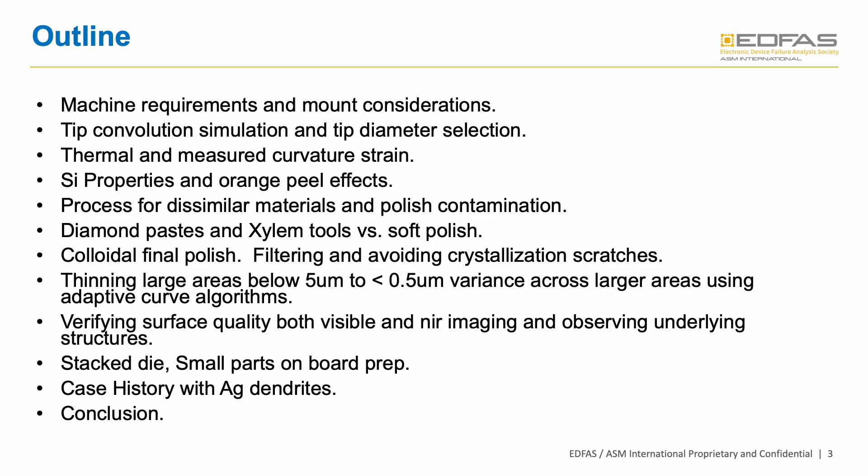So the first thing we're going to cover are machine requirements. So we're going to overview the modules and the mounting methods. The first thing I want to talk about on the machine is how to fit large boards on. So there's an open design where you can place a rather large motherboard in the machine, and you just need to be aware of this Y max value. This is 7.5 inches to the back mast of the machine.

The device can be processed from beginning to end. So you can have it on the board, you can do the thinning, you can do the inspection, you can do the polishing, all of that including the RST measurements without removing it. This allows us to get the submicron precision out of the machine. The endpoints can be based on time, position, force, or capacitance and resistance functions, which we'll be going over in the next few slides.

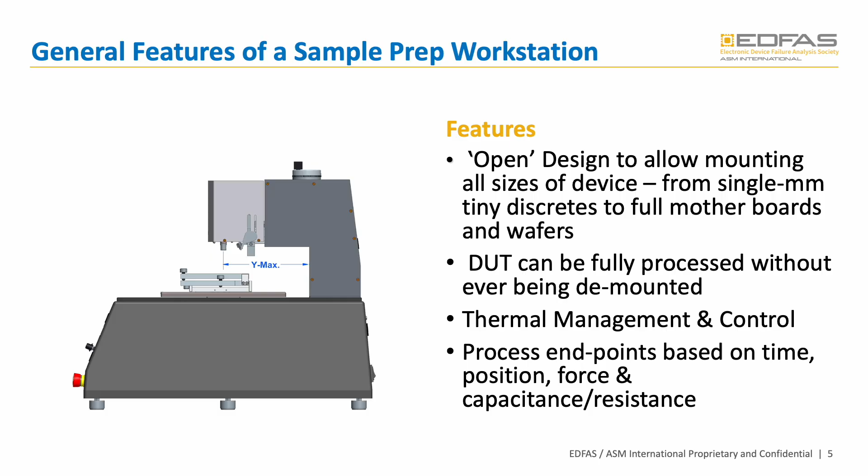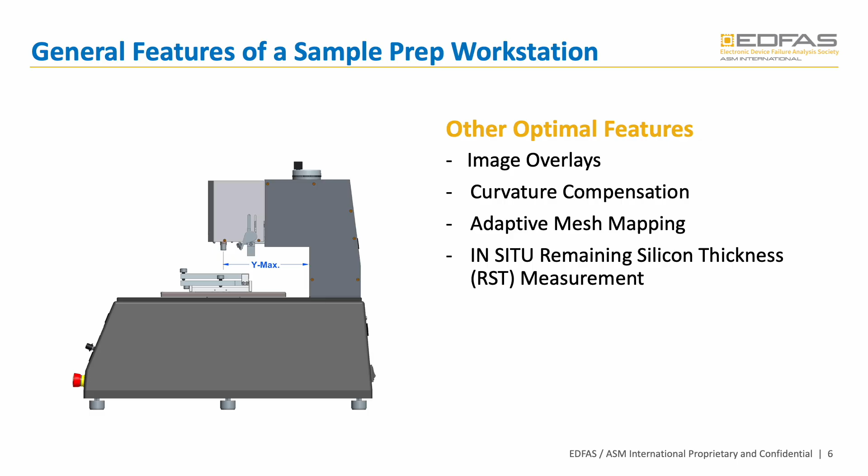Some other features: image overlays, curvature compensation, adaptive mesh mapping, and in-situ remaining silicon thickness. So as I mentioned earlier, by being able to leave the part on the machine, we can do the RST measurements. So by combining mapping and polishing, this is what makes the high-resolution control possible. So you start out with a curvature mapping model. So this is an R-squared model where you're actually defining a curve and forcing that curve on the part. This is based on thinning the part, measuring the RST thickness variations from center to edge, and then matching a curve based on the tip diameter.

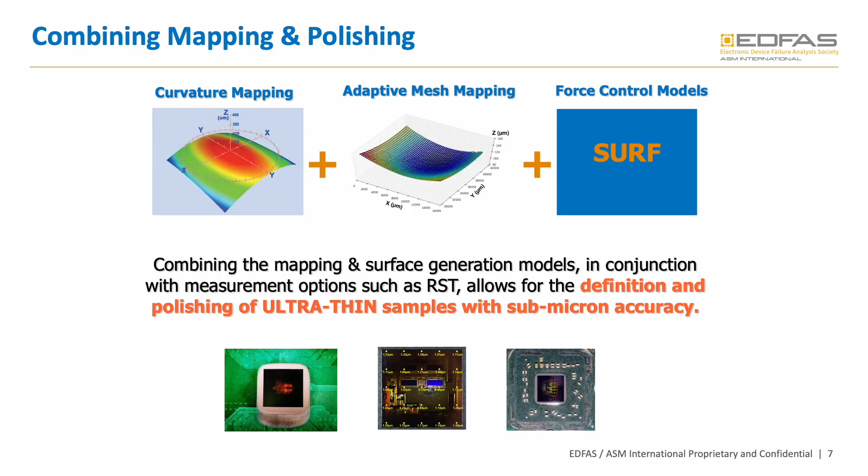Once that curve's established or surface is established, then you add in the mesh map, and after you've added in the mesh map taken from the interferometer and you define that surface, then you use something called surf. So what surf is doing, it's a surfacing control. It takes out the error in the force sensor so that you have a very deterministic Z head as the part is contouring the surface. So by combining these functions, we can get submicron accuracy out of the machine.

There's also image overlays. This is if you want to target a particular area. You can load in diagrams, x-rays, or even image of the same part or similar part that's been prepped previously to use as an overlay.

So the endpoint I alluded to earlier, the way this works is you have the tip biased with a 3.3 volt high impedance pulse, and then you have the lower plate which is tied to a high impedance amplifier. So we're sensing the pulse through conductive or semiconductive water. Because the water is contaminated when you're thinning, it's automatically going to be slightly conductive.

So as that upper plate approaches the die, the capacitance increases, and then once it reaches any one of the bonds, which you can see over here on the right side, once it hits these bonds in this area, then you're going to get an endpoint response. So you can set the machine to trip based on that endpoint response to make the process somewhat automatic.

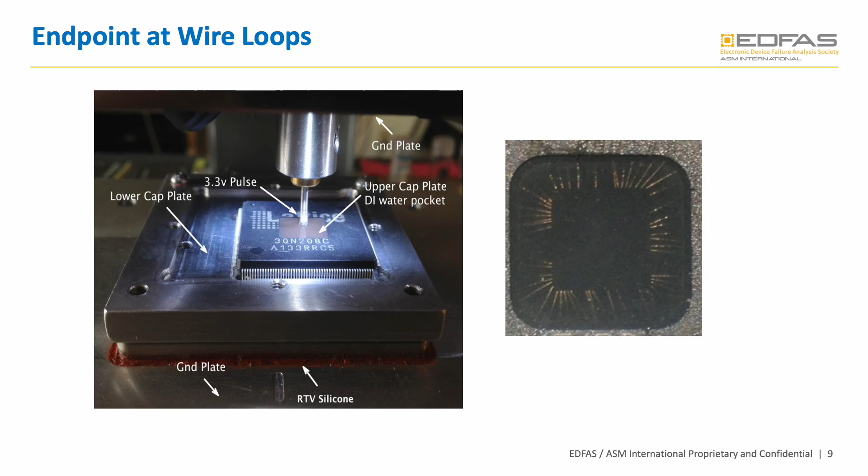So let's talk about mount considerations. It's very important to make sure that the sample's properly mounted. So when you place a sample on here, you want to be sure that it's secure. It could be nylon screws, it could be a hot melt wax, and you also want the part to be aligned so it's squared up to the machine.

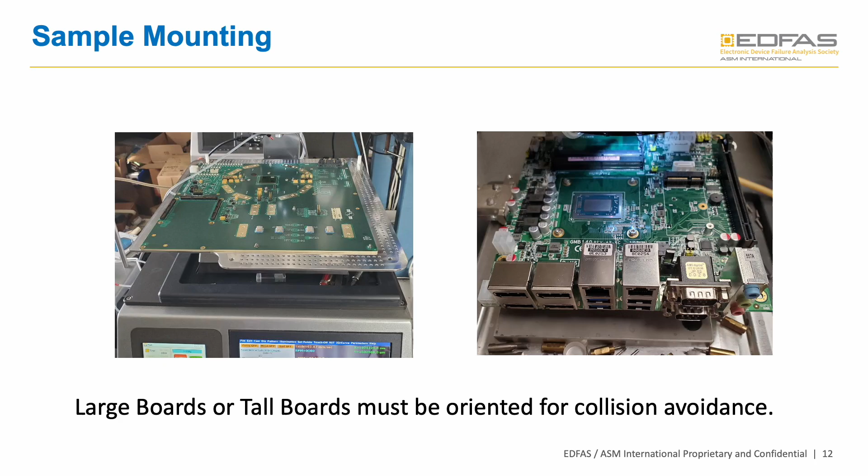What about boards? So if you have very large motherboards, this board is so large, but the part that we're going to be thinning is offset from the center. So it still meets the tolerance from the DUT stage to the back mast of the machine. On the right side, we have some very tall RJ45 and USB connectors, which would actually strike in the back of the machine. So by having this face forward, we mitigate that problem.

With 2.5 3D die, you have to be concerned with, when you have multiple chips, are they all the same thickness? And they typically do vary by 5 to 10 micrometers in thickness. So be aware of that when you're thinning, as to which one is your target die and whether it will be thinner or thicker than the die you're not interested in.

What about underfill? In this case, the customer wanted me to thin this die, but there was no underfill. So I added underfill using the little internal thermoelectric plate that's on the machine, so I could actually observe the underfill creep underneath the die. So I used an EP3UF underfill, and this underfill cured in about 20 to 30 minutes.

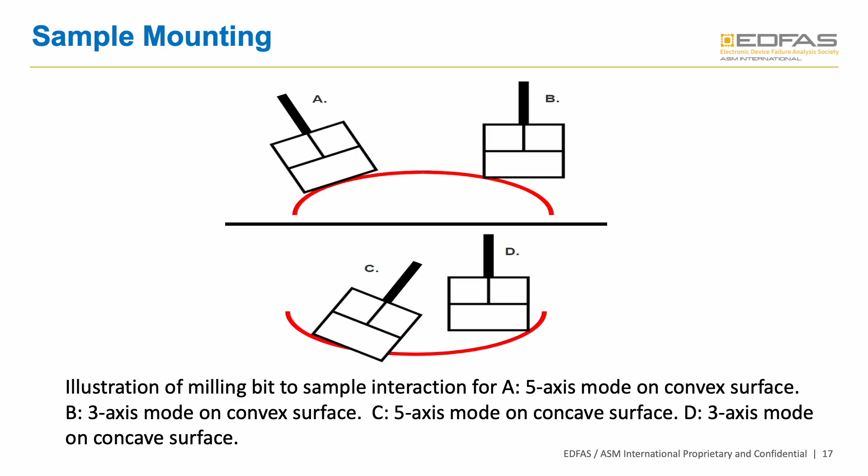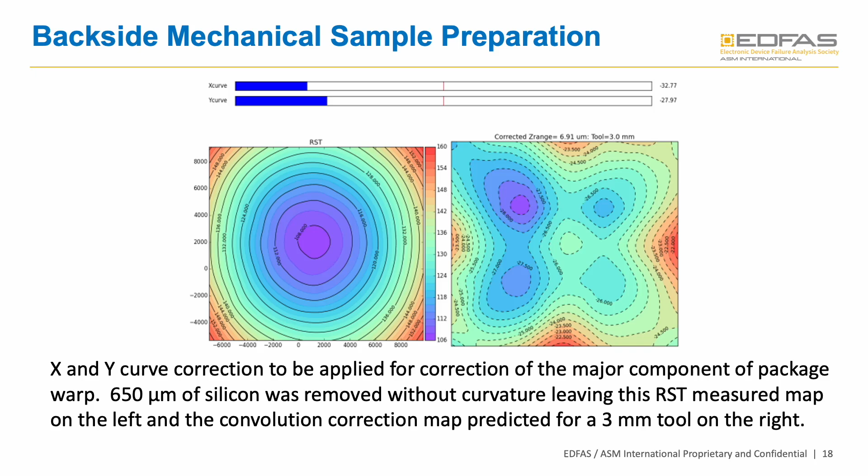Now, how about the change in curvature of the part? As you're thinning these down, while you're removing layers of silicon, the warp curvature is actually changing. So this is a dynamic event. And so the best way to approach these is to do what I call flat topping the part, where you remove the silicon and you don't worry about the curve, you just flat top it. Take it down to about 100 like that previous curve showed, or even 50 if you're going to say 20 or 30 microns or less.

So you thin it down, and that gets rid of most of this relaxation. And then from that point forward, you're just going to do the curve plus mesh models and let the machine iteratively correct the smaller changes in the curvature of the part.

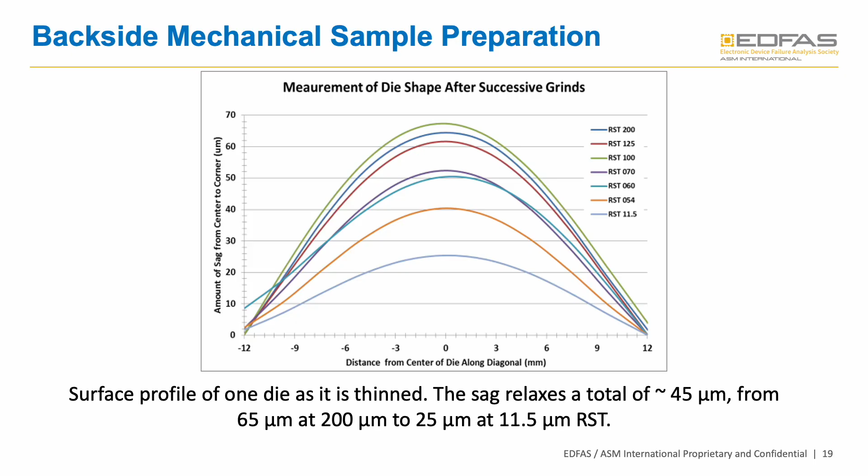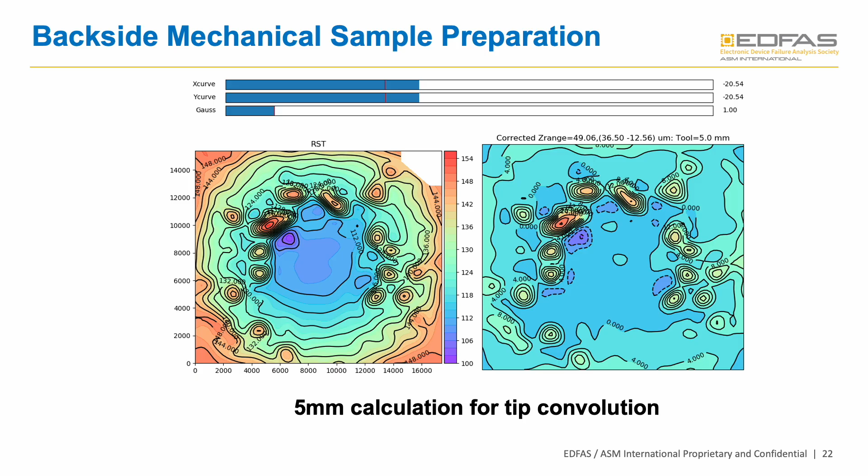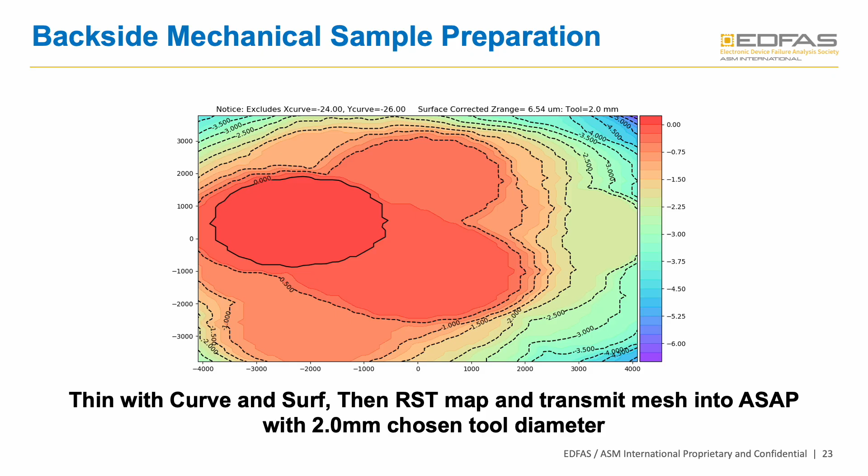Once that's established and you have removed a small amount of silicon to create that curved surface, then you measure that surface, you transmit that mesh model into the machine, and now you're taking the curve you've already created and you're adding this RST mesh model. And with these two running together, you're now greatly reducing the errors in the surface based on what the irregularities of the part had versus the theoretical curve that you're trying to use.

So let's talk about thermal and measured curvature strain. So this part has a low crack risk because you can see at ambient temperature, we're running in the minus 27s, and on this machine, if you're seeing minus 45s, that's where you really need to be thinking about thermal. For anything, minus 30s, minus 20s, minus 10s, those are fine.

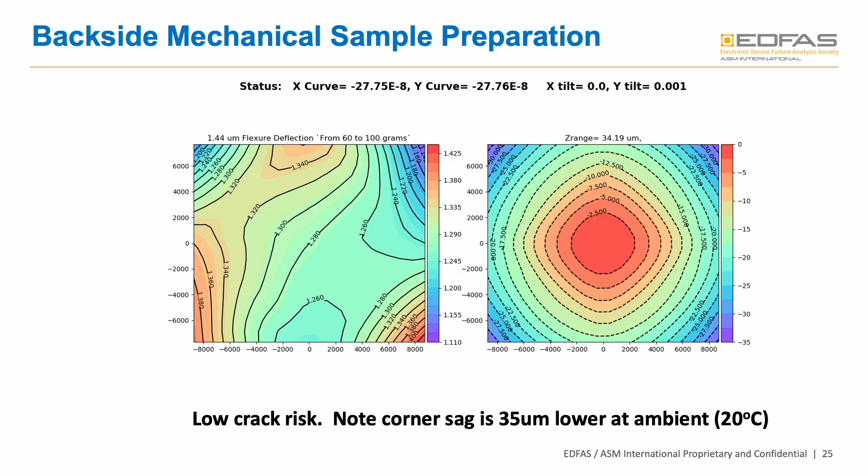Now, if we heat this part up just to show how much it relaxes, you can see we're in the minus 27s, and we can see that the edges are about 35 microns deeper than the center. If we heat the same part and do another drop-down profile measurement on the machine, we find that those edges are now about 12 deeper than the center. So it's changed quite a bit from what it was previously. And you see the X and Y curves are now minus 7s, minus 9s, so much less curvature.

Now remember that chart you saw earlier where as you thin it, the part relaxes and changes. So what will happen is as you're heating and thinning this part down, once you get below, say, 100, the curvature is going to relax typically on the part enough that you no longer need thermal. So typically you want to do the thermal, thin the bulk of the material off, turn the thermal off, remove a small amount more material with an extra fine diamond tool, then do your RST mapping and go from there.

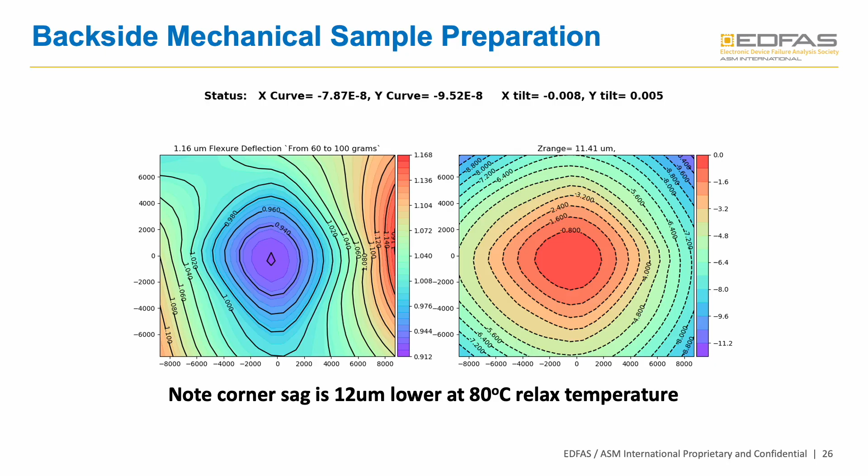Well, what about thermal management when it has to do with the part itself dissipating power? Well, in that case, what you want to try to do is limit your viewable area where you must thin and leave the silicon thick in the other areas where you've got a great deal of heat generation. Because remember, once you thin the part, you no longer have any lateral ability to dissipate the heat.

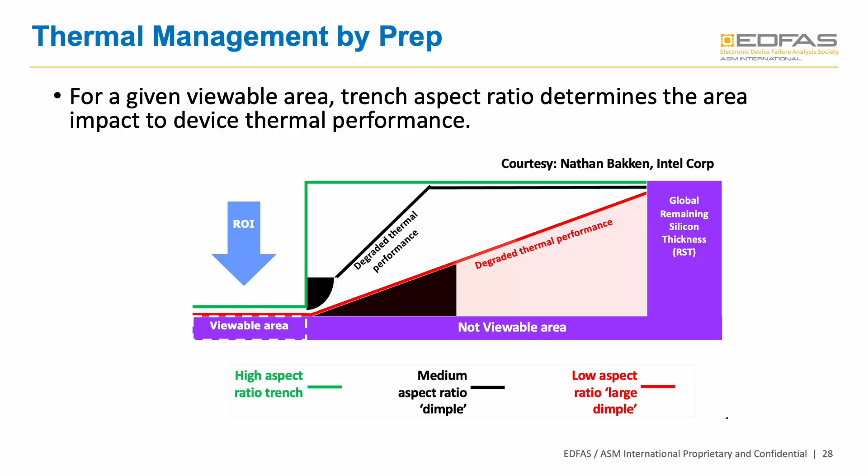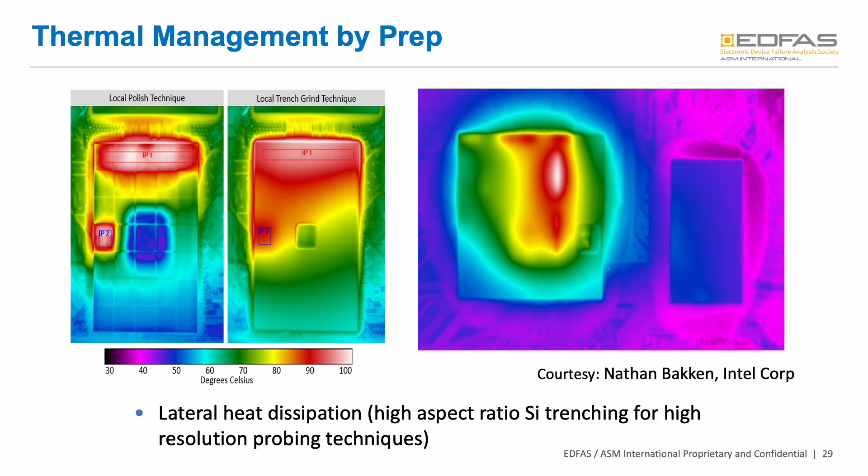And so if we look at a local polishing technique versus this trenching technique, you can see this area is red to white, which is hotter, and it's a little bit cooler here. And so what you're trying to do is set this up where only the trench area is where you're going to actually be taking your measurements, and you're leaving the silicon thicker in the other areas to do a better job of heat dissipation. So with power devices, this is something you've got to keep in mind.

Now, what about the properties of silicon in terms of its translucency, and how does it respond when you go ultra thin? In this case, we have the Lambert-Beer absorption law, where with a light of intensity I0 incident on a piece of bulk silicon, the light's attenuated based on that thickness of silicon as a function of its wavelength and its doping concentration.

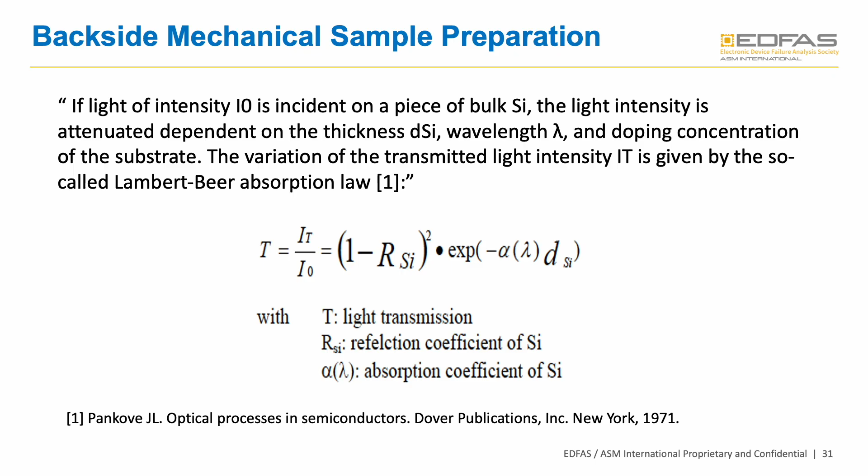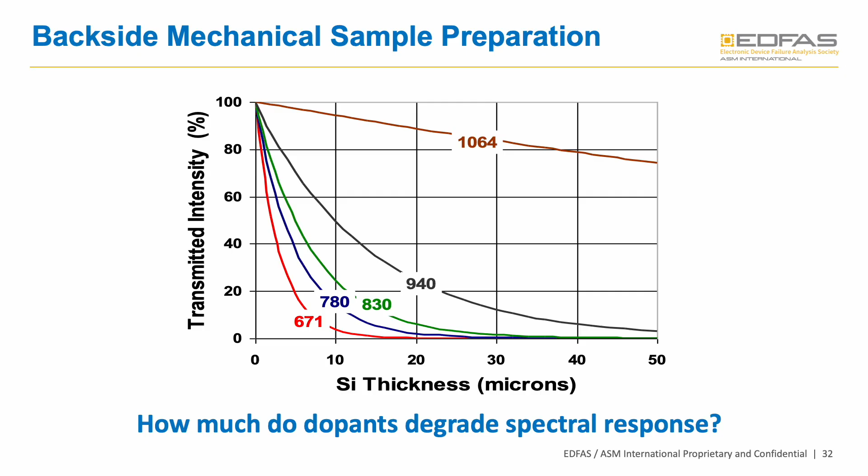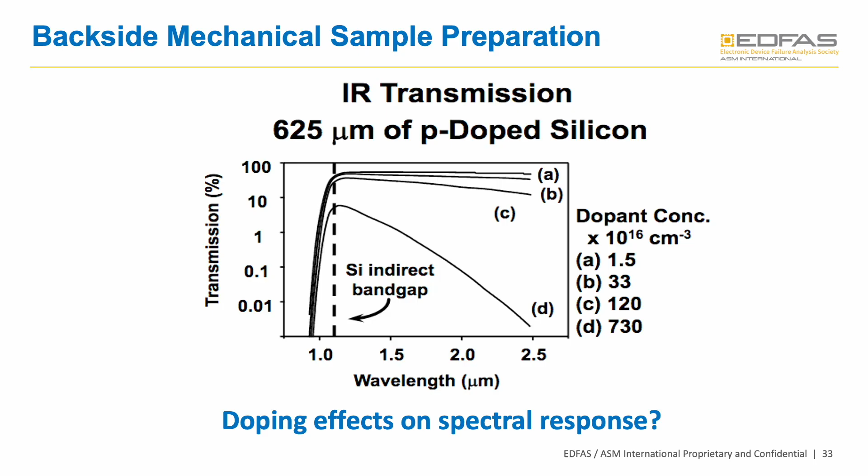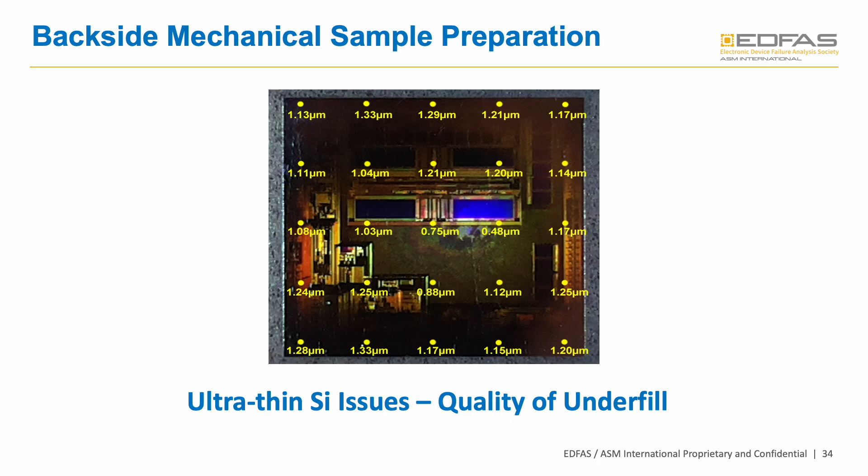So this is a challenge for the interferometer if you're looking through thick silicon, because the dopant concentrations are going to limit what you can pick up with the interferometer. So you'll have to thin some and then measure. So with ultra-thin silicon, well, what are the issues? Well, when you go really, really thin, it's not a matter of whether the machine will do it. It's a matter of whether the part can withstand it. So the quality of your underfill, the type of strains you're dealing with on the part, all factor into this.

And so if you look at this part, this one's been thinned down, ultra thin, and you can see that on this side these are where all of the bumps are, and they're putting strain on the silicon. So the silicon acts like saran wrap, and you can see in a laser interference mapping where all the bumps are, the irregularities of the fringe patterns, the moire patterns around each of these bumps.

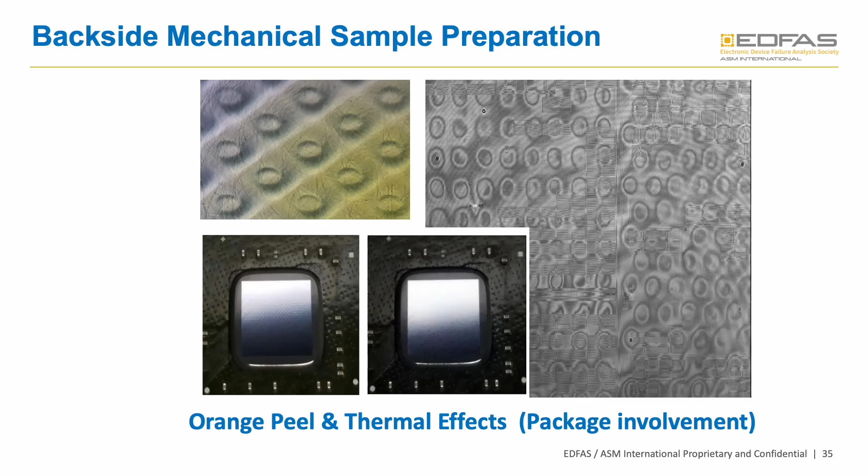And so if you heat the part up, you'll see the bumps appear. If you take the part to the temperature at which you prepped it, you'll see the bumps disappear. And of course, obviously, you wouldn't want to reflow a part when it's this thin. It's unlikely that it would survive.

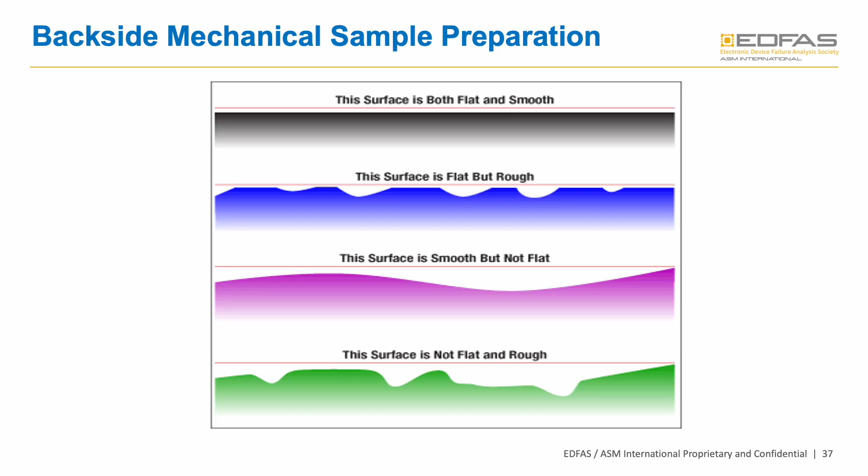flat and smooth. If you over polish the part, you will end up with the third circumstance, which is smooth but not flat. So with pits or defects on the part, you can get multiple peaks coming off the interferometer. So be aware of that. When you're doing measurements, you'll occasionally get outlier data points.

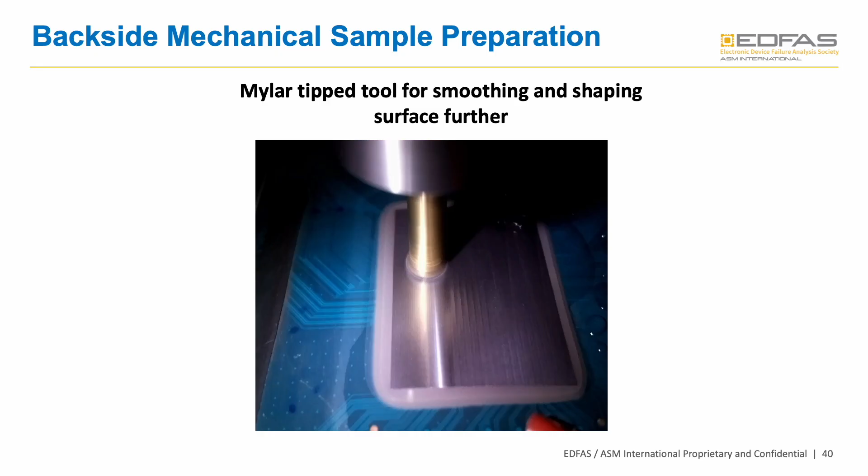In the process to shorten the cycle, so these are the tool marks from the diamond. Then switching to a diamond mylar tool, you can see that this is a much better surface. It's more of a matte finish, and the tool marks are now gone on the part. So by doing this intermediate step, you can go straight to the colloidal silica step. So this shortens or bypasses some of the diamond steps.

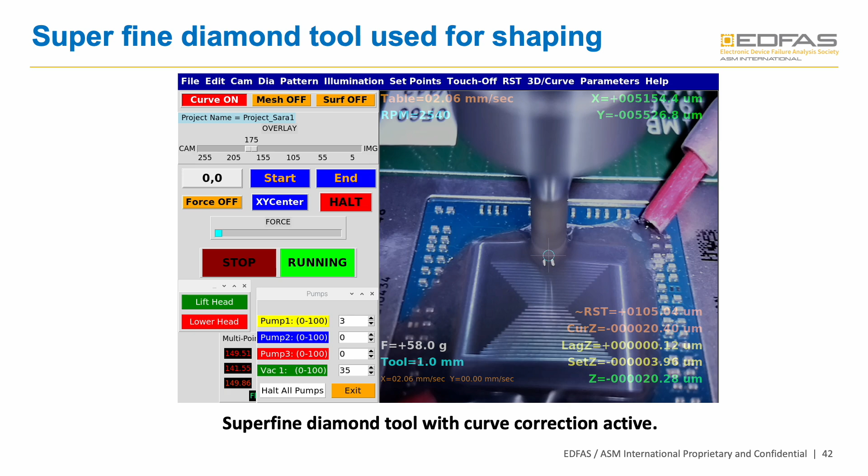So now let's talk about forming the surface. Once we've thinned the worst of the silicon off, we turn the curve on based on those set curve parameters. We run a spiral pattern, and we define this surface. And so once this surface is close to defined, we turn this surf function on. So this function here we turn on. And then the part, once the forces settle out with the force map, which I'll show in a subsequent slide, then we're ready to go ahead and measure the surface.

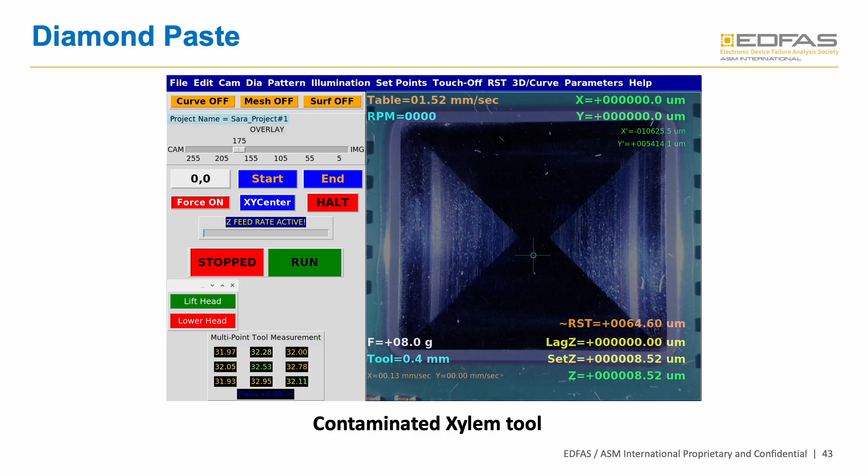We take an RST map of that surface, we feed it into the machine, and then we switch over to the diamond paste with the Xylem tool. Well, you can see in this image that there's some contamination that generated some streaks at this point based on the angle of the tool. And so what had happened was some of the glass particles were picked up out of this underfill, and they got caught in the tip, and so as the tip got to this particular angle, it started to generate these streaks. So what this means is we need to clean up or redress the tip.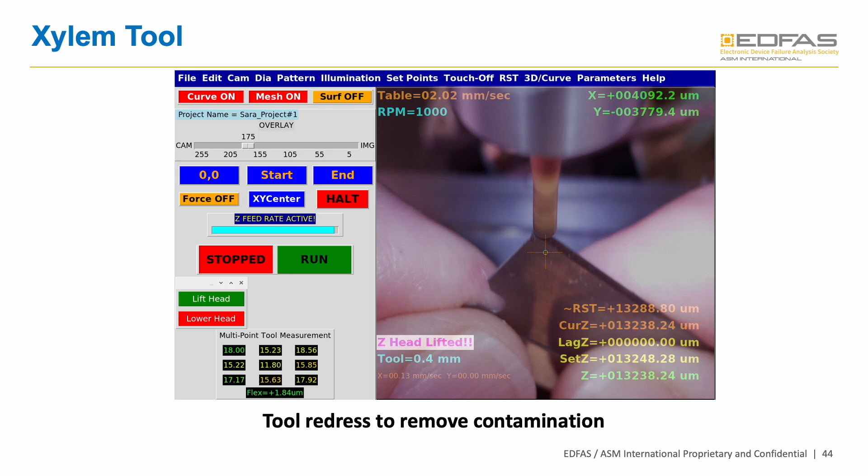So you redress it with a razor blade, you do it on end to dig a little cup in the bottom, and then you just flat mill it or flat grind it with the razor blade with the spindle running. Then you're ready to proceed with the same tip. Second option is throw the tip away and put another tip in.

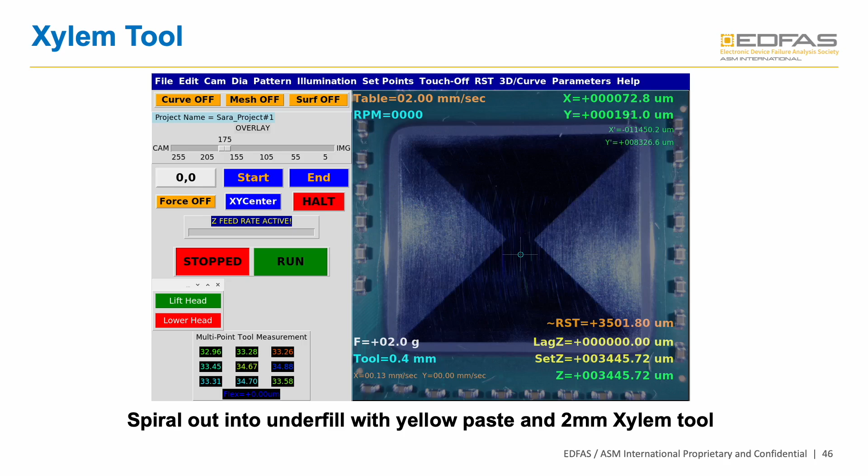So now, same part. Now you can see we've gotten rid of those artifacts and we've got a uniform matte finish after the yellow paste. Now you can notice these little terrace marks. Looks like an X or an hourglass running along here. And that's perfectly normal. That's a very subtle optical effect. As we go into the polishing steps, that'll completely disappear. You won't be able to see it. Once you enter these polishing steps, that's where you get rid of those subtleties on the device.

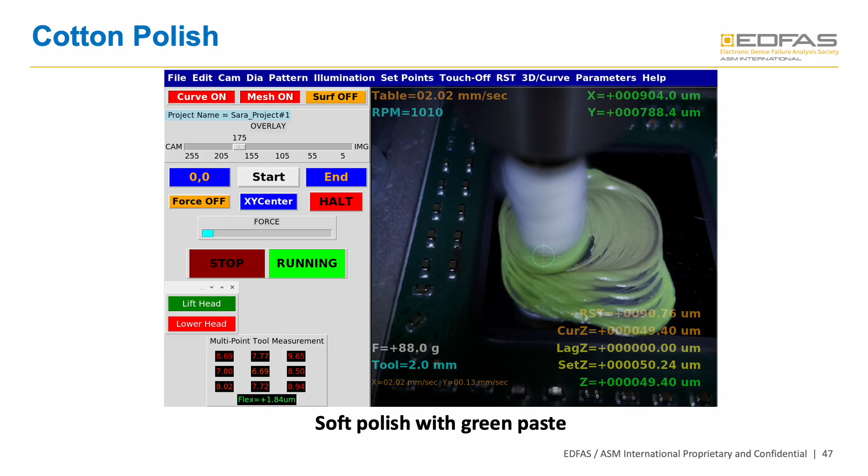So this is a soft polish using a cotton bud, and this is using the green paste, which is an even finer diamond grade paste for achieving the polish on the part. So now that we've done that, the large area, we want to thin a smaller region of that large area below 3 microns with about half a micron variance or better. So we're going to use the adaptive curve algorithms to do this.

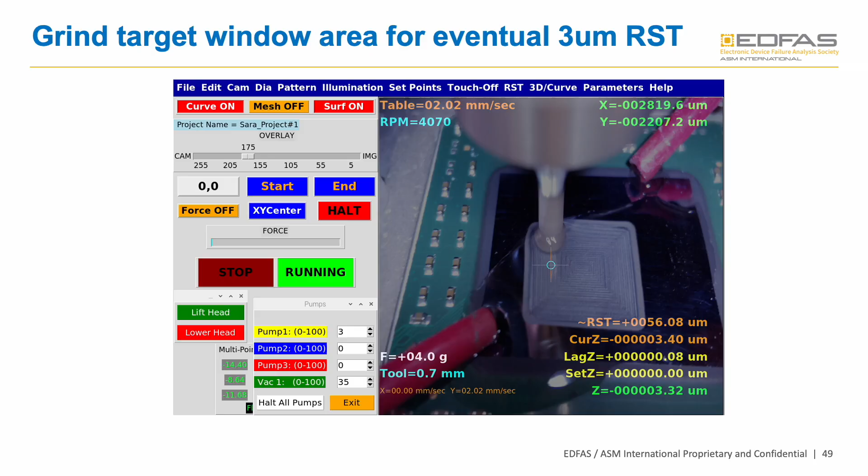So the first thing we do is we correct over this particular area that we're going to do the thinning. We treat this as a new part. We do the automated drop down tilt measurements. With this area defined, we go ahead and grind a little bit of material off. And then we proceed the same way as we did before, where we're adding the mesh maps and the curves into this.

And then once we've done that, we switch over to the diamond paste, and we use this feed mechanism where we're slowly feeding the tool, because the tool is wearing. So the paste is wearing the part, but it's also wearing the tool. So by using a slow feed, we compensate for the wear of the tool with the surf turned on, the mesh turned on, and the curve turned on. And the only thing we don't know is how much material we've removed. We have to judge that by time. But we do know that we're generating a flat surface.

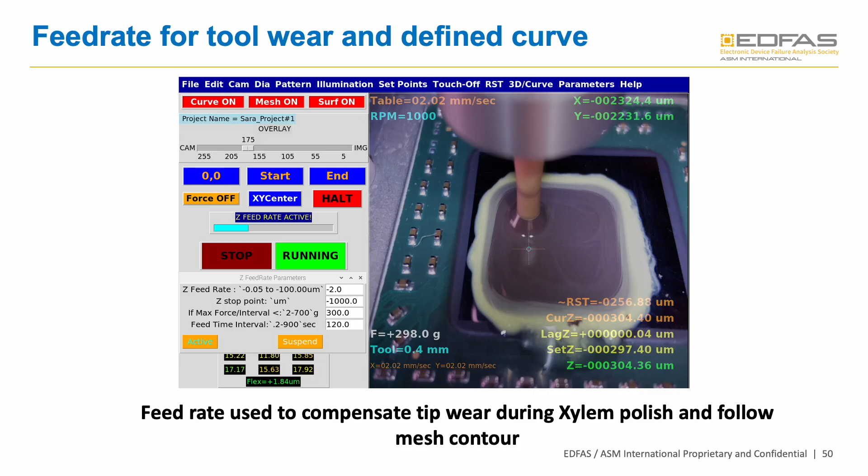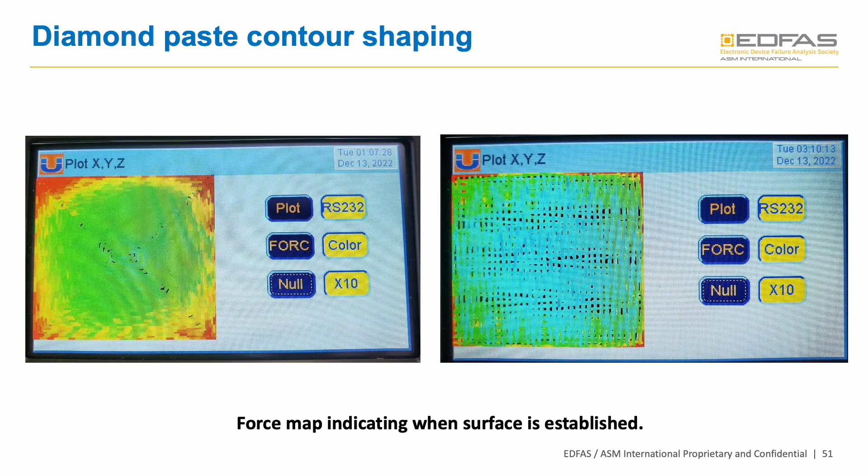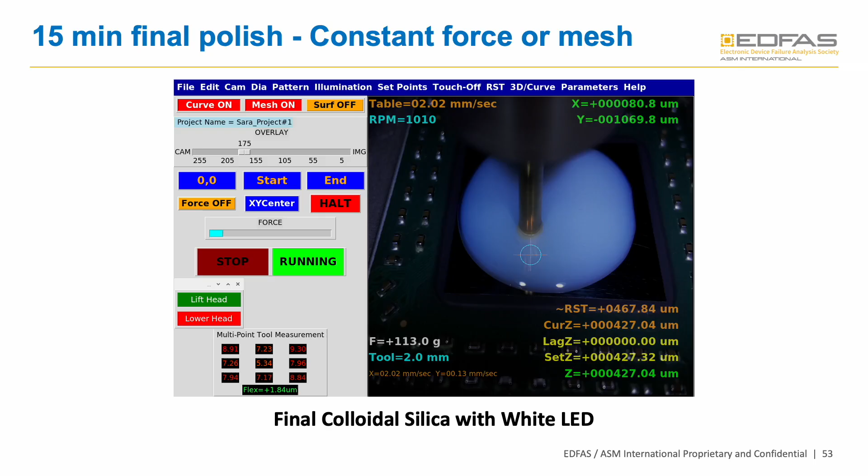So this is a colloidal silica that's being polished. You can't see through it with visible light. If you go to infrared, you can actually see the circuitry glowing from underneath in a few areas here as this is thinning. And this can be useful because as the colloidal silica starts to get filled with regular silicon particles, this will become less transparent in the near IR. So you know that your colloidal is starting to get too contaminated, and it's a good place to stop. I typically just use the 15-minute rule when I do this.

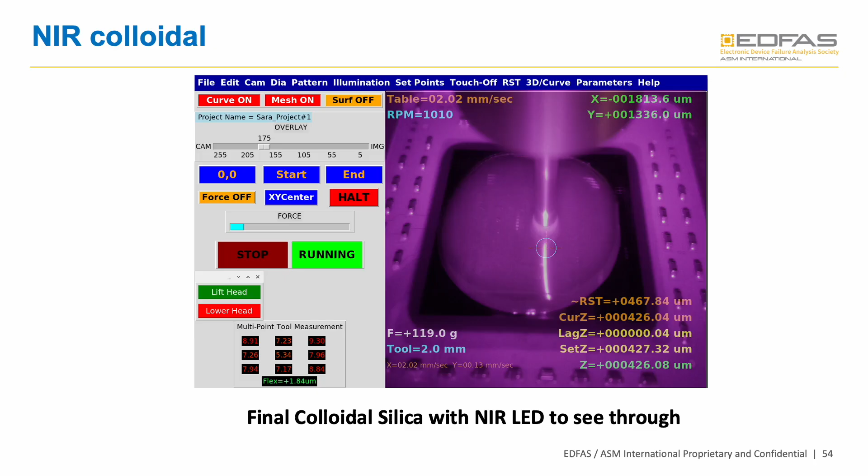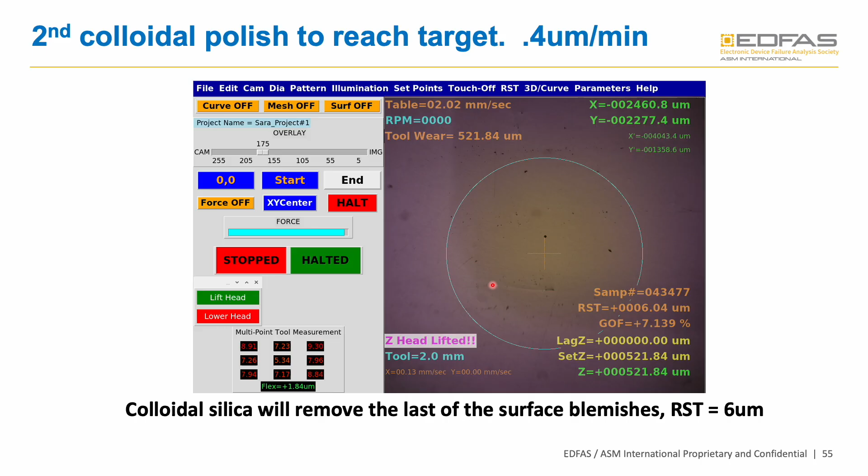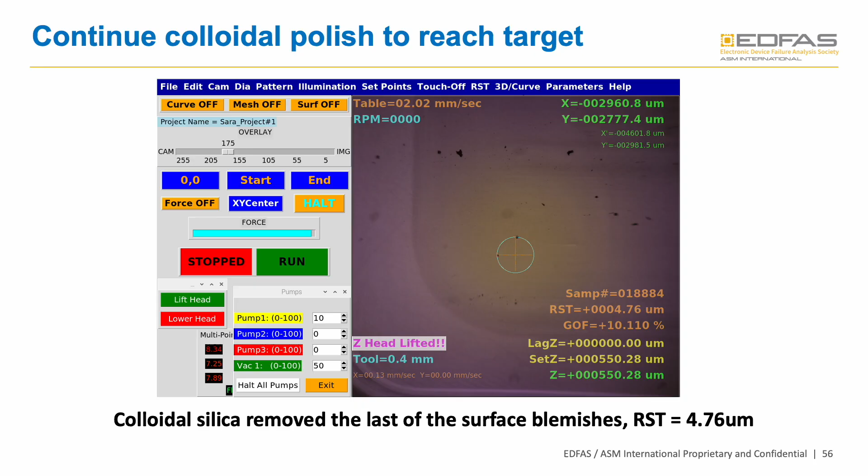So now we're at 6 microns, and you can see right here there's a little bit of a scratch or a score right here. And so we'll go a little bit longer. And now we're at 4.76 microns, and you can see that scored area is now gone. And our goal is to reach about 3 to 3.5. So we just continue polishing with the colloidal, and now we're at the 3.5. So you can see in this mesh model, 2.8.

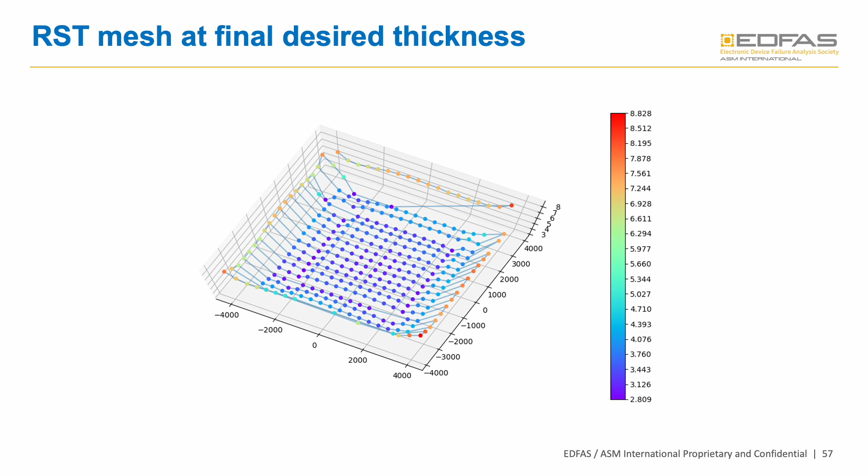And then these edges out here, this is where the area lips up, and it can't read on the visible interferometer. So we're limited to about 9 or 10 microns maximum for the visible interferometer. You can roll this on its side and get a cross-sectional view of how the floor of your part looks. And then this is the exact same data represented in a contour mesh.

These white areas in the corner are because the visible interferometer could not read these thick areas here, so the software guessed on what those corners are. But the takeaway point here is you can look at the corrected Z range here. So if 0 is in the center, you can see we're varying from 0 to 0.4, and then finally as you move pretty close to the edges about 0.8 or 1.2. So this contour map shows you that you've got a nice, decent surface in here to continue the analysis.

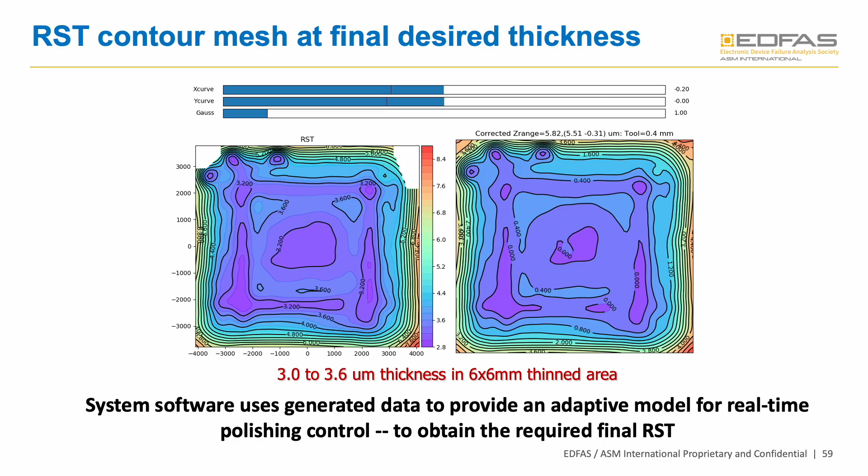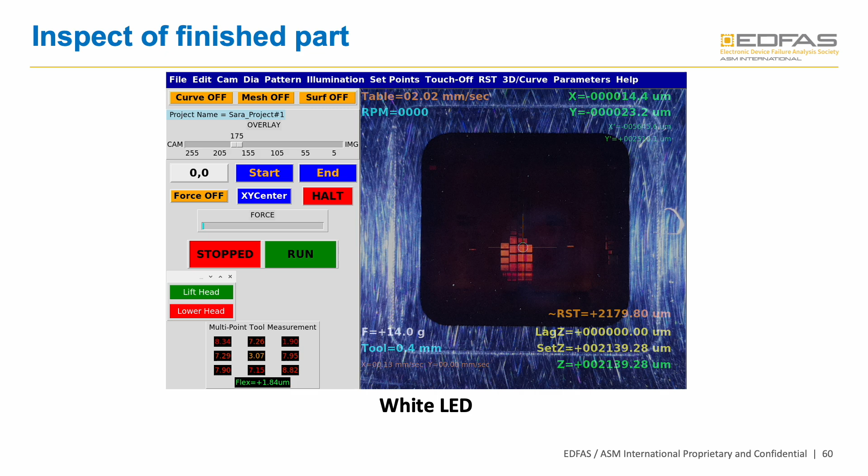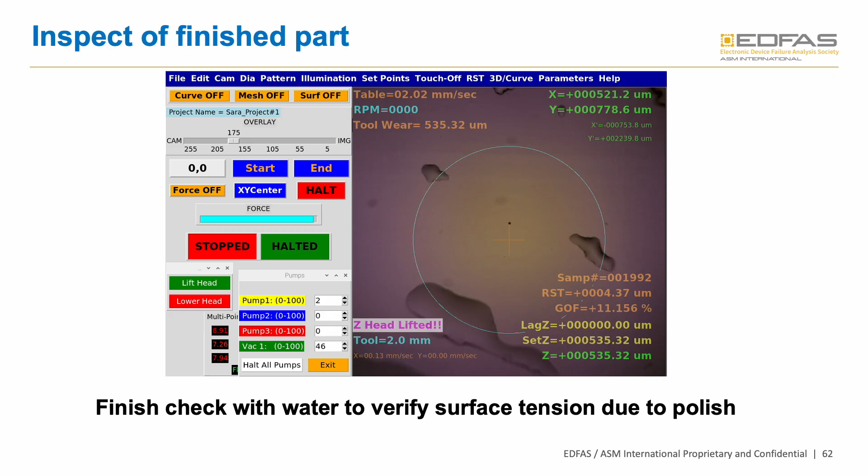And then if we have any water on here, you'll notice the water beads up, it de-wets because it is a nice polished surface. This is a visible illumination with the part removed from the machine and just put under a standard stereo zoom microscope. You can see the nice red glow with the 3 micron thick part.

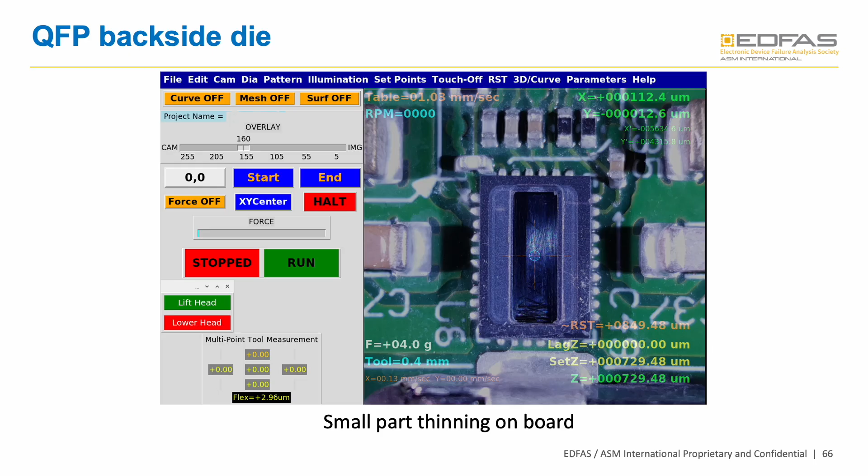This is an example of small devices such as QFPs and SOT23s on a small board. So this one has been thinned. You can see the shadow of a capacitor right here. This capacitor is annoyingly close to the edge of the die. So this one required an X-ray overlay in order to make sure that I properly targeted this die. Then this is another part on the same board.

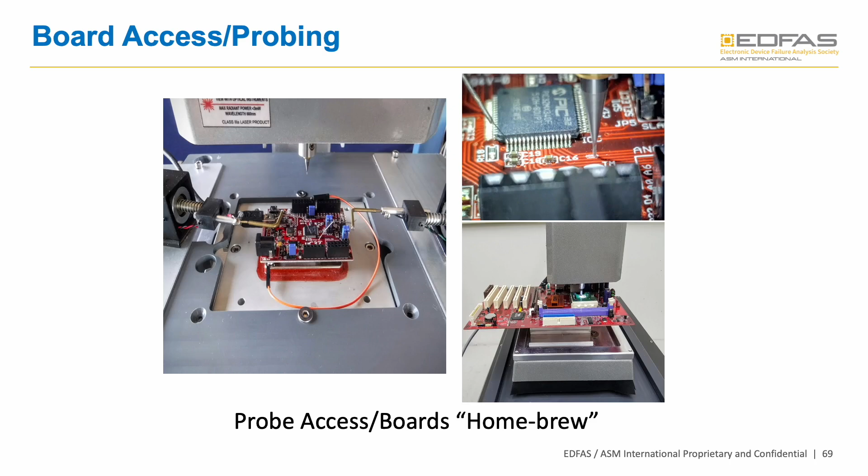And then this is a few kind of off the beaten path things you can do. So in this case, you have a homebrew arrangement where you've got a board that you can actually attach with some probes and probe some pins on a part while you're coming down with a milling tip and milling and picking up access on a board. So we've got a lead dropped here. We're using the milling tip as the other side of the probe. And then you can measure continuity of traces or cut traces to verify that they're open. I've already shown where you can put motherboards on here to be able to thin as well.

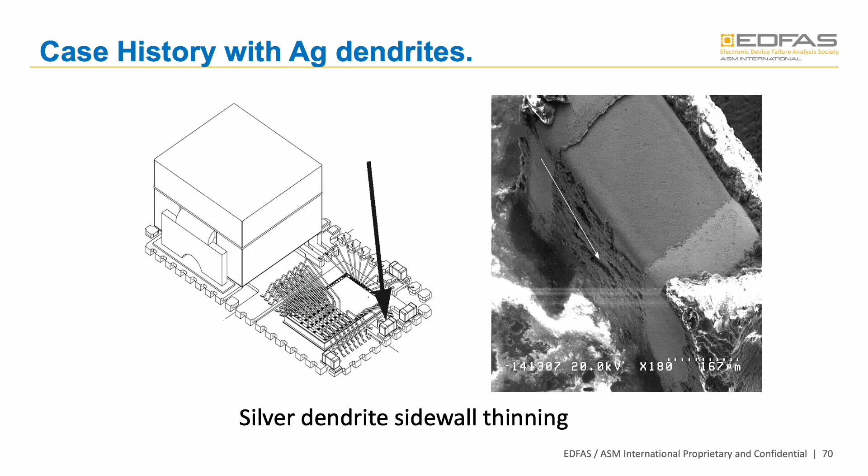So we're almost done. This case history is with silver dendrites. This was a part that whenever you opened it, the leakage would go away. So I used the machine where I very gently approach this capacitor from the side where the arrow is. And then I had the leads hooked up to a curve tracer so I could watch the parametric instabilities as I was thinning. Once I got extraordinarily close and there was just a little bit of this plastic left along the edge, which you can see right here, then we went into the SEM and looked at these areas where there were open pockets and found silver dendrites.